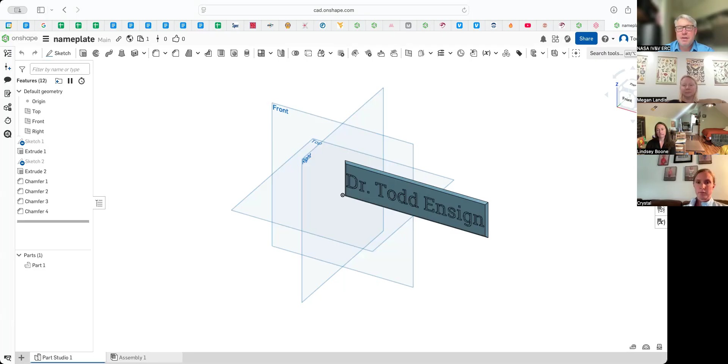So I said, well, I'll just make my own. As I advised before, you never begin a project without taking careful measurements or knowing what you're going to do. So I started on a piece of paper and sketched out the dimensions of the thing. Let me grab it.

I happen to have sitting in my office gray and black plastic. I didn't have beige and black, but here's what I'm going to do: I'm going to print some gray, then do a second layer in black, but use the extrude feature to remove material 1 millimeter deep. My theory was that the gray would show through.

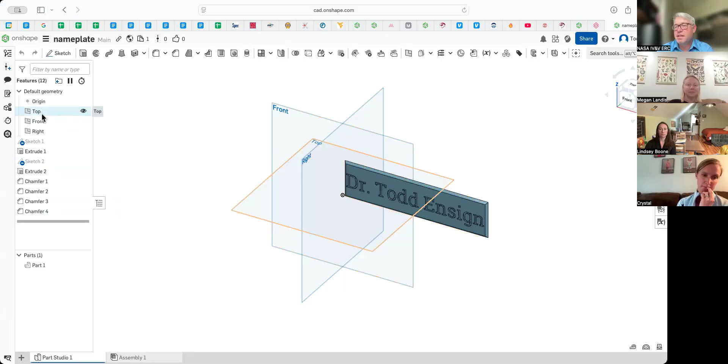So if you look over here at my model tree, you can see here's my work planes - top, front, right. And if I scroll down, there's sketch one. Let's open up sketch one, because if you're working with kids and they make something, they're like, Mom, it's broke, I don't know how to fix it.

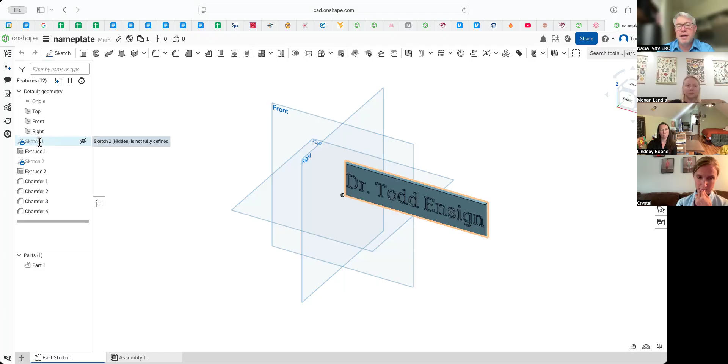What's going on? You have to dissect what they did and figure out how to fix it. So let's go into sketch one, which is the original outline. I'm going to square us up to the face, and here I can see I measured out the plate was 37 millimeters - we're going to stick with metric and millimeters for all these projects, okay?

I measured it at 152 across, and so here's the one I made compared to that one - they're really close. I'd say I might be a millimeter shy on one end over here, maybe it's 153, but otherwise it's really darn close.

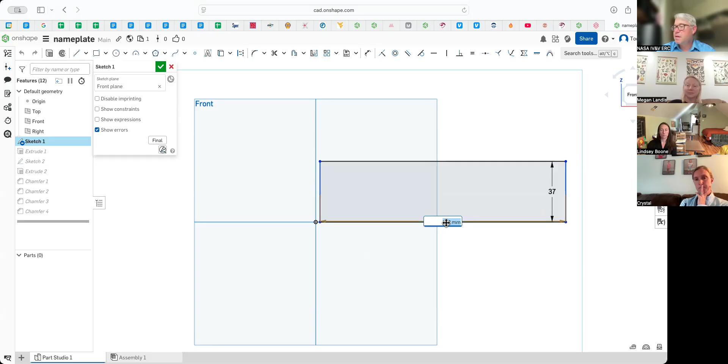What you could also do - I'm in the sketching tool - I can say it's 153 millimeters. Okay, I just messed something else up, but we'll see how that works. So I'm done with my sketcher, hit the checkbox, come back out.

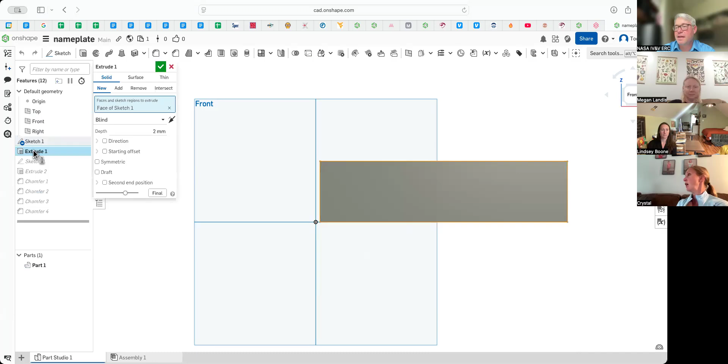Then what I did was a second sketch. So you can see, I extruded sketch one. Let's look at that. Okay, so if we want to see the thickness of it, if we look at it in isometric, you can see now that's no longer a dimensionless square. It's now essentially a cubic form - it has a third dimension, a z-axis now. I guess I made it 2 millimeters thick.

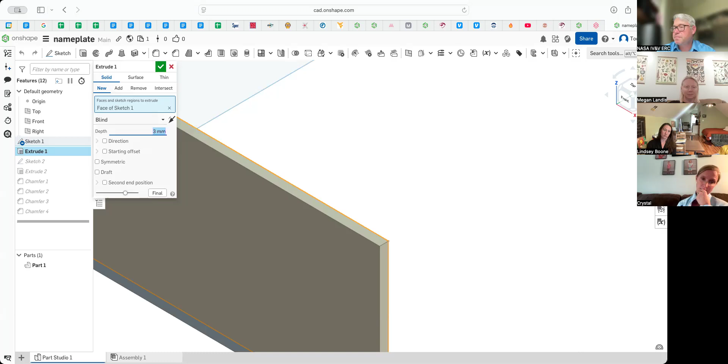Actually, it could be a little tighter - it does stay in there, but it could be a little tighter in the slot. So maybe I want to make it a little thicker, 3 millimeters.

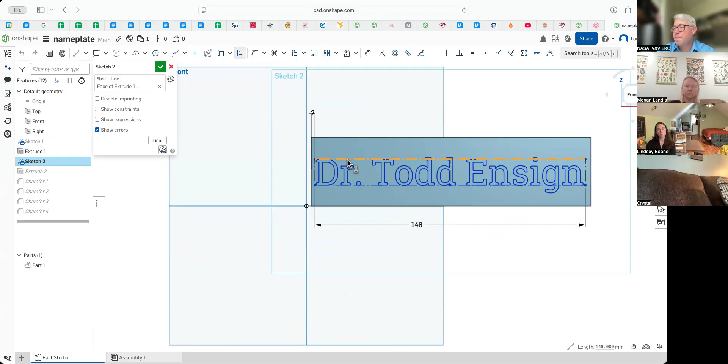Then I did a second sketch. Now this second sketch, what I did was I looked at my tools and there's a texting tool right here. So I went ahead and clicked that, added text, and if I click in here, we should be able to edit the text. So if I type something wrong, I can change that. There's also different fonts you can choose - maybe I want Roboto, not Roboto Slab.

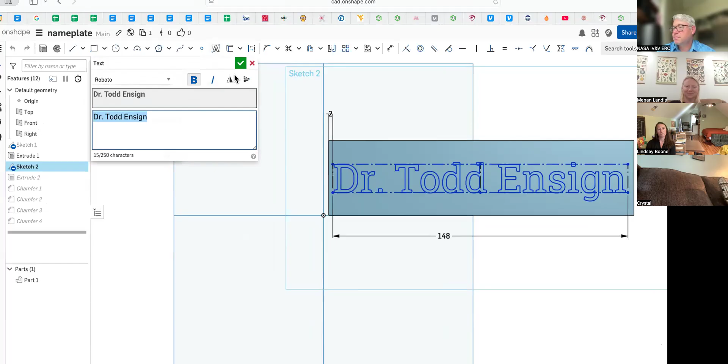Was it already bold? I can't tell. Nope, so it definitely looks different now. Okay, that's a different font.

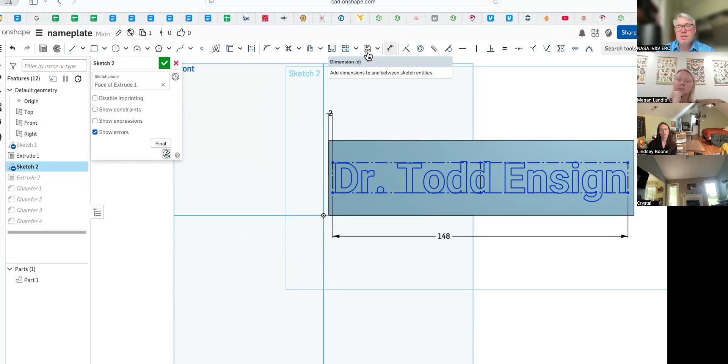I wanted to center it in here, and to do that I took the dimensioning tool, which we used before - that's the arrows pointing like this. This is a very important tool because if you want to put a hole in something, you need to know how far it is, and that's part of this pre-designed understanding of what I'm building and how it's going to get built. So this is where it gets to be math and engineering - this is where we're getting the STEM part in it.

So we just made this 148 millimeters, and I made it 2 millimeters apart from there. So I'm going to say it's 2.5, and that should center it now, I think. So it looks pretty good.

Okay, check. And now what I did to make those letters, which were just a dimensionless layer with no depth to them, is I extruded them. So I extruded them 1 millimeter into the material to create that engraved kind of aspect to it.

And I think that looks fine to me. That looks at least as deep - I think it's deeper than what they had in their original one.

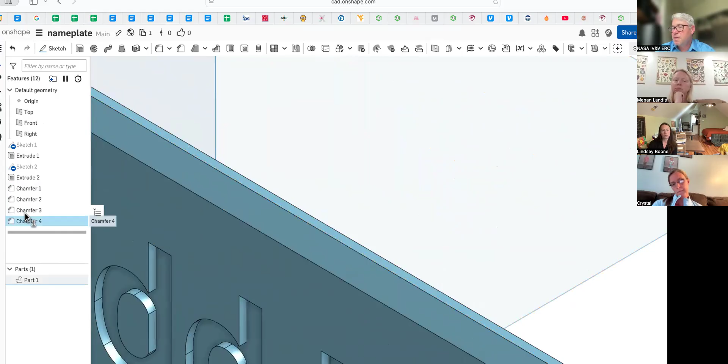Then I went through and I said, how is it going to slide in? The metal bracket has a little kind of edges on it. And so I went to the edge of the material and I chose essentially... let me delete that one. So if we look around here at this object...

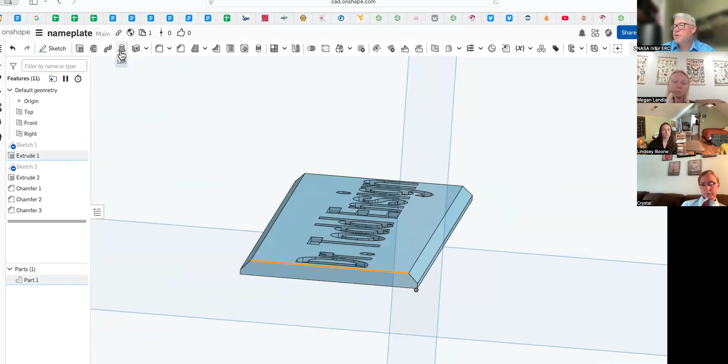Let's see, there it is. This edge is not chamfered. So I'm going to click on that edge right there. So I've only chosen the edge itself because that's what I want to do something to. Let me look through my features up here, and I can see - oh, chamfer.

And I'm going to make this - I think I just did 1 millimeter for all the rest. Nope, looks like they might have been 2 millimeters. Okay, can you see how the edge just got removed? Okay, checkbox, good. And that looks pretty sweet.

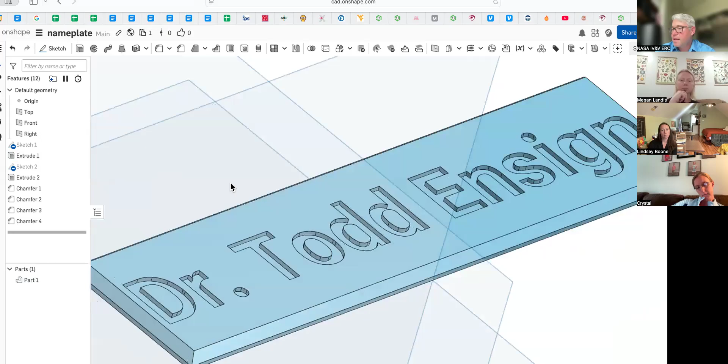So anyway, that's how I solved the problem I had. And that's what I'm trying to emphasize - once you get familiar with using CAD, these are things you can do yourself. So let's start a new project.

I'm going to hit Onshape, create document. You don't need to follow along step by step right now - I'm only going to show you one new feature. We've already done a cube, we've done a cylinder. Let's do a sphere. A sphere is going to get us into our revolve, and we're going to also learn about the cutting tool, which is also really important.

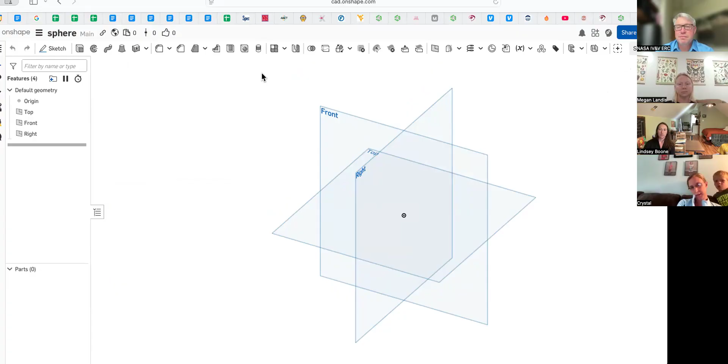So pick a work plane - anyone. Lindsey, which work plane should I work on? Top. Okay, I just read her mouth. So I click on the top, see how that works - now it's highlighted. So okay, I've selected one. I also could go over here to the model tree and click on the word top. I am going to spin it around so I'm looking straight down at my work surface.

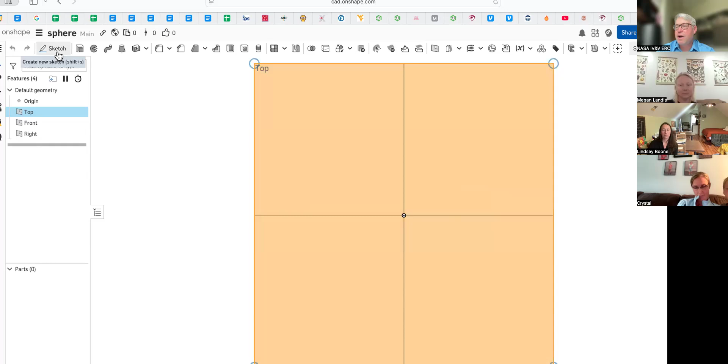I'm going to now go to the sketching tool. This sounding familiar? It was a week ago, but hopefully the pattern I'm doing - you're like, oh yeah, click this, click sketch. Okay, so now the tools have all changed. Now I have the sketching tools, and we're making a sphere.

Okay, so to make a sphere, what's the two-dimensional version of a sphere? Crystal, you got a helper there. What do you think? If we're looking at what's a sphere versus what's this two-dimensional shape?

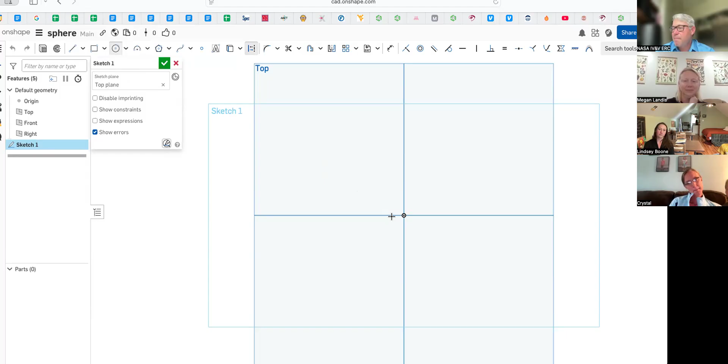Circle. Yeah. So what we're going to do - look, I have different circles in here, right? So here's my circle tool. There's a center point circle, a three-point circle, elliptical circle. Let's just choose a center point circle. I'm going to snap to the origin, see how I get close to that spot and it just highlights. So I click once and I drag my mouse away.

If you screw this up, you can always go back and edit the dimensions. But at this point, if I click one more time, it's asking me what dimension I'd like my sphere or my circle to be. And we've been making everything 1 inch just because 1 inch was kind of a convenient number.

And here's a pop quiz for you, because conversion of metric to imperial is important. So what would a 1 inch diameter circle be in millimeters? It was 22 point something. No.

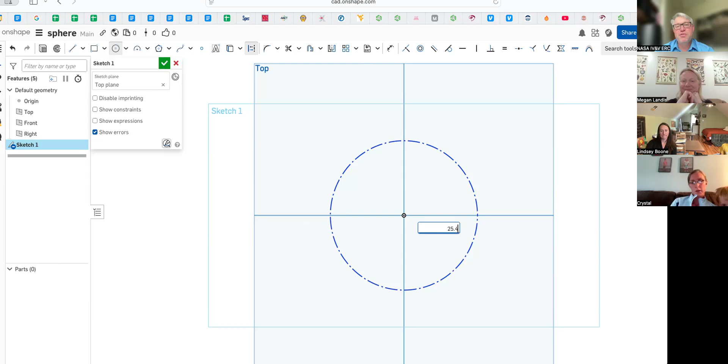Crystal with math: 25.4. So it turns out 2.54 centimeters is an inch, and because metric is a base-10 system, you just move the decimal. So 25.4 millimeters is 1 inch. Check, okay, so I did that.

Now, in order to do a sphere, I don't want an entire circle. What I want is half of a circle and an axis I can spin around. So how am I going to do that? Oh, I got the line tool.

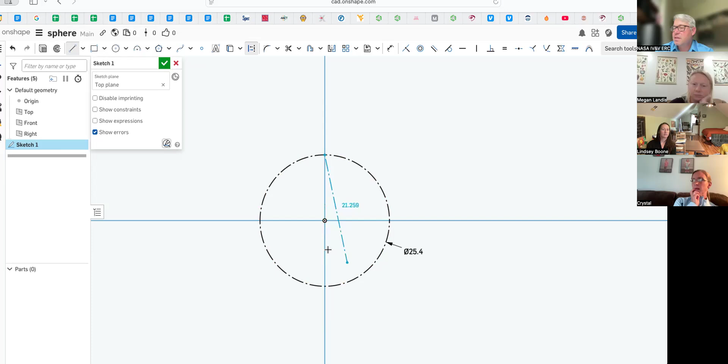Okay, line. If I bring my line tool over, it should snap. See how it's highlighting and snapping. I'm going to click right there and it's snapping to the main lines. I bring it down here and I can see the circle highlighting again, the outline of the circle. So I click again and now it wants to make more lines.

This is really annoying because you end up with like 18 lines all over the place, and you're like, stop making lines. So the escape button is your friend. I'm out now. I don't know if you can see it, but there's a line right there.

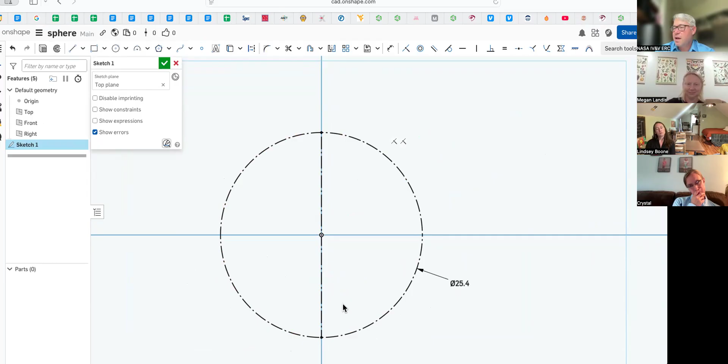Okay, so what we're going to do is look up here at our tools. We don't want a full circle and a line in the middle, you just want half a circle. So there's the trimming tool, and I'm going to trim that off. Okay, so now I have half a circle with a line through it right here.

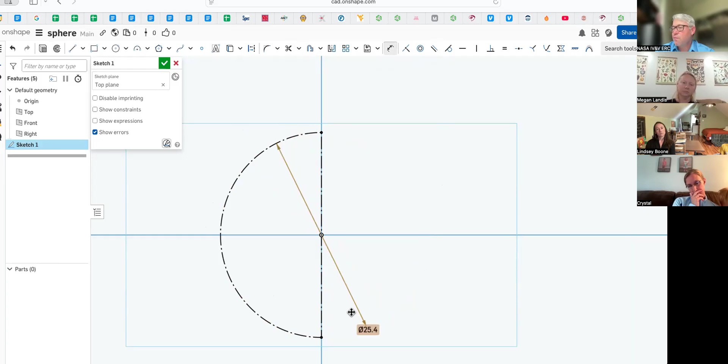And the dimension tool should still be referencing this diameter here. Okay, we're going to say check, we're done.

Now what we're going to do is highlight this shape. Actually, this is a great time to point out that I saw this mistake coming up and I was just going to see what happened. The lines are dotted, do you see they're not a solid line? That indicates it's called a construction line.

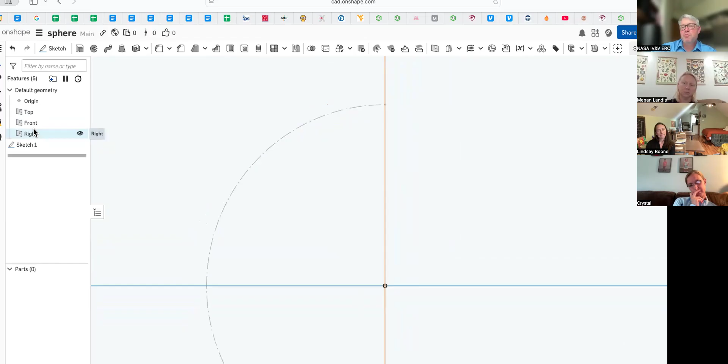Often I will make a construction line through something so I can find the midpoint or mark where I want to be able to snap to or make a measurement. I don't want to make that the object, I just want to have that as a tool for me to specify, well, here's the halfway mark or here's this. So I have to go back in the sketcher and click on that line.

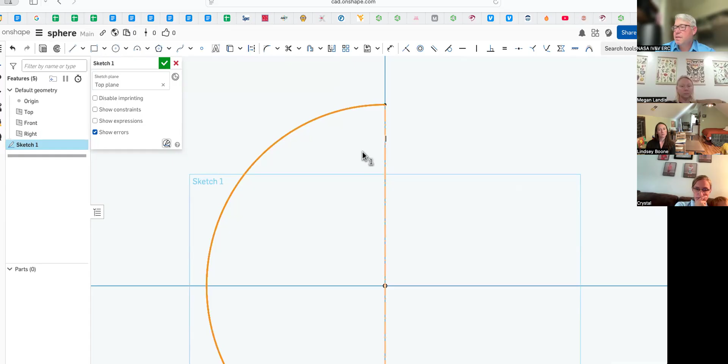And I didn't notice this when I was doing it, but the construction line is on, meaning that this is not a real line, it's an invisible line. I'm going to turn that off so that's a solid line. I'll click that line and turn that off. So now the shape is shaded in.

So I guess I should be embarrassed, this is not a smooth video where I show you perfectly how everything works. But I guess in a cool way, you get to see a mistake, right? The worst part is I knew it was going to happen, I saw the dotted lines. I'm like, why is that a construction tool? So apparently that button was either bumped by accident or it was selected.

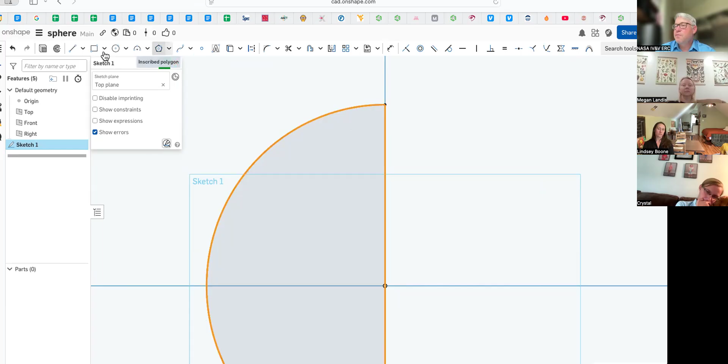So the shape is now shaded in and filled in. That tells you the shape is complete and closed. Why is that important? So for example, if I were using the line tool and I did a line, a line, a line, and got really, really close but didn't close that, you see how it's not shaded in? Okay, that's not a full shape.

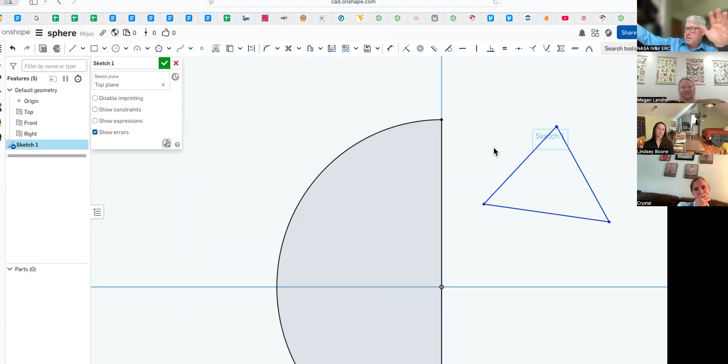So if I were to try to choose that, essentially the computer wouldn't know how to handle it. CAD software would be like, I don't know, it's going to spill out into everywhere. Even though zoomed out it looks like it's one line, it's not. So if I click on that and drag it up, I can connect it. Let's see, it's not connecting. That should be connected now.

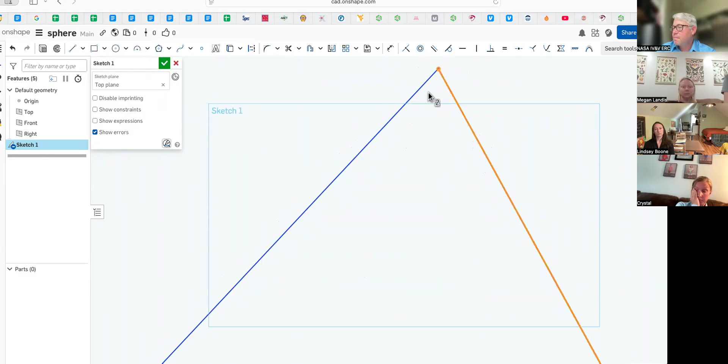Oh, that's not shading in. So if I were to take a square and do like this, see how it shades in? That means it's a closed object and all the edges are closed. Okay, so I'm going to just highlight these things and get rid of them. Okay, so we have a closed shape, it's shaded in, we can move on.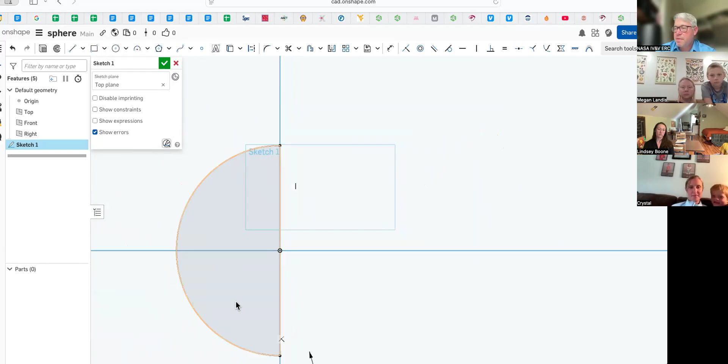So now we're going to try a new feature. Now that I'm out of Sketcher, we've already done extrude, we haven't done this other one here called revolve. So I click on revolve and it asks me for two critical things. One, it says right here in blue, faces and sketch regions to revolve. So the face is the shaded object. Click, it says okay great, got it. Then what's in red right down here, now it's asking me for, can you guys read that?

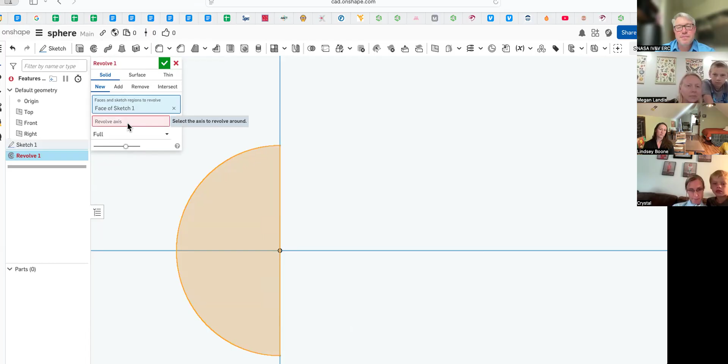The revolve axis - what axis am I revolving around? So I'm going to click on the red box and click on that line right there. What we're saying is we're going to take this two-dimensional half circle and spin it around that axis.

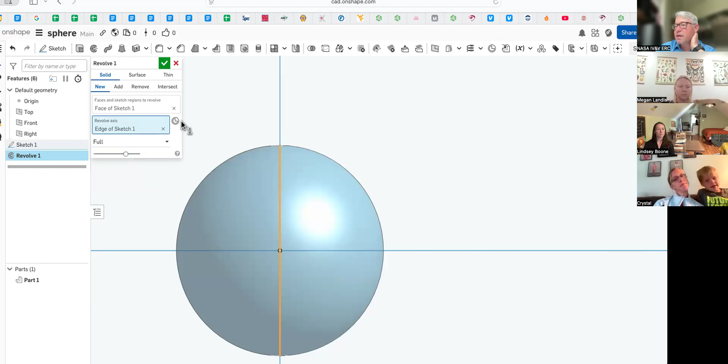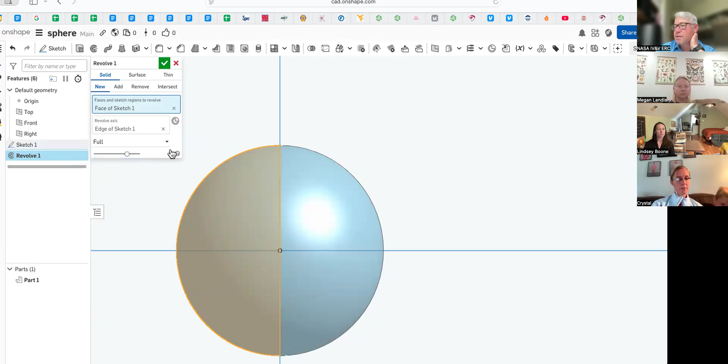I can show you that, because it says full right now. Let's see, I can usually preview - oh, that's just the shading. I was hoping I could show you how to do it not fully around. Oh, here we go, one direction. It says now I've done it 145 degrees. Can you guys see that it's now only a slice, like fancy cheese?

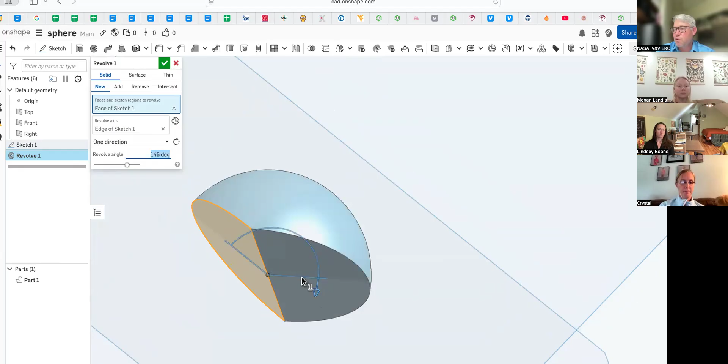Okay, and there's an arrow here. So this is what I wanted to show you - this is what's happening when I'm revolving around the axis. You can see the axis right here, which is the edge of that half circle, and it's adding material as we go. So if you only wanted to make a turtle shell - one of the cool stories I read recently was about people saving turtles who had their shell damaged by a propeller, by 3D printing a shell for them.

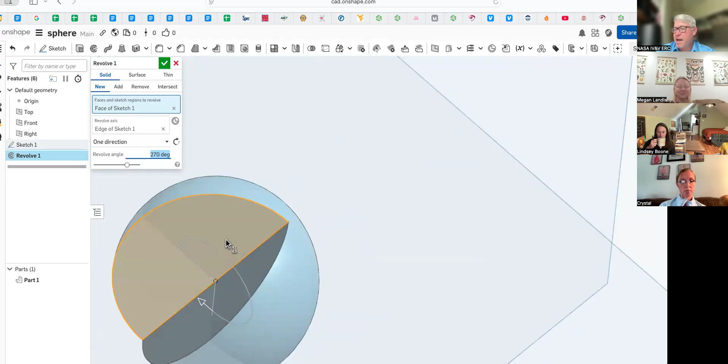So if I only needed a turtle, I'd go around only halfway. If for some reason I wanted to have Mrs. Pac-Man, I could do that. But usually, and it depends on what you're making, we're going to go all the way around. So there is the profile, there is the axis, and there's the shape.

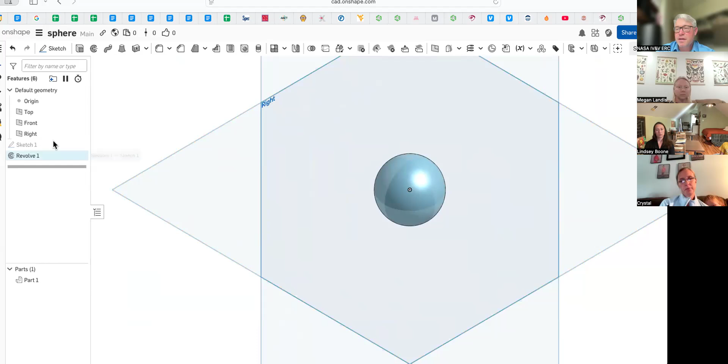So check, I made a sphere. I'm going to reiterate that next step, which is how do we make this ready for 3D printing? So I go down here to the word part. The whole object I made is highlighted. I right click and I choose export.

It says great, you probably want to export out in an STL format. I'm going to call it sphere, and it's in millimeters. We talked about resolution briefly before - if I'm doing a cube, I could choose coarse, it's just 90-degree angles, really easy, no need for any rounded objects. But if I drilled a hole through that, or had a round object, I really do have to choose the fine resolution. It's going to add more triangles, which is what STL files are.

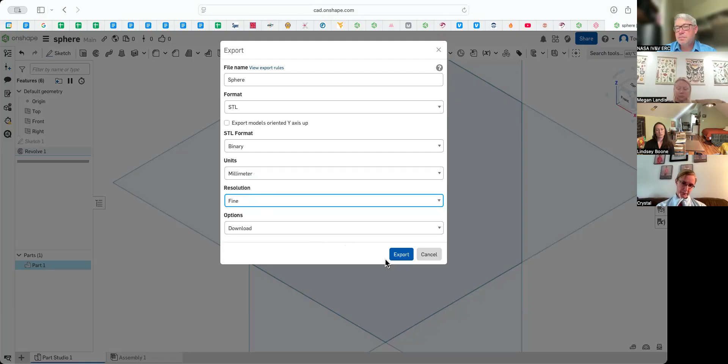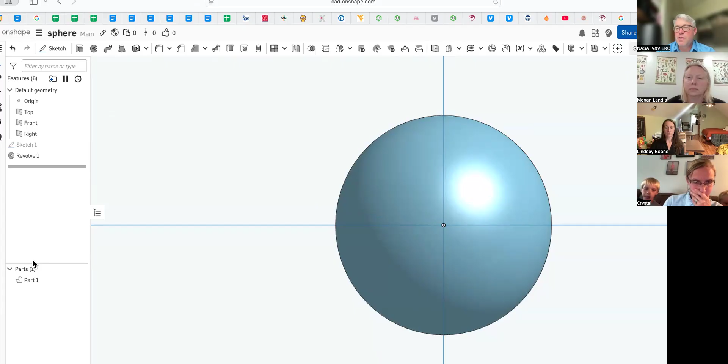It says download, I hit export. It says great, I'm going to go ahead and do that. It's saved right here. Okay, so what I'd like to do - we're going to pause and you're going to make a sphere. All right, so we made a sphere. I don't know if you had a chance to go ahead and click on the part and export it out as STL, but that was the last part.

Let's reinforce this concept of revolve - it is a really cool feature. I'll create a new document. Now, when I was in middle school, I made a lamp on a lathe. We took all this wood, glued it together, had this big giant chunk of wood, and then we put it on that lathe, and it spun around, and I chiseled away wood, right?

So if I want to make something like, I don't know, a lamp, what I'm going to do is create half a profile of what I want, and then I can revolve it.

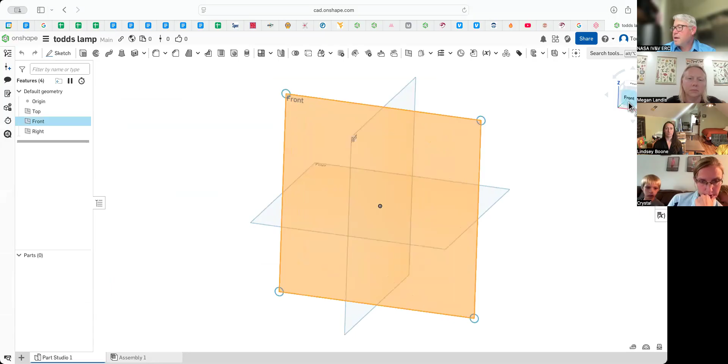So I'm going to click on the front work plane, and in this situation, I'm going to click my sketching tool - I'm just going to use my line tool. Now, in this case, I'm going to make a larger object. This is going to be a small desk lamp. But still, it's going to be, say, 5 inches across, so I need to be 2.5 inches in half of the profile.

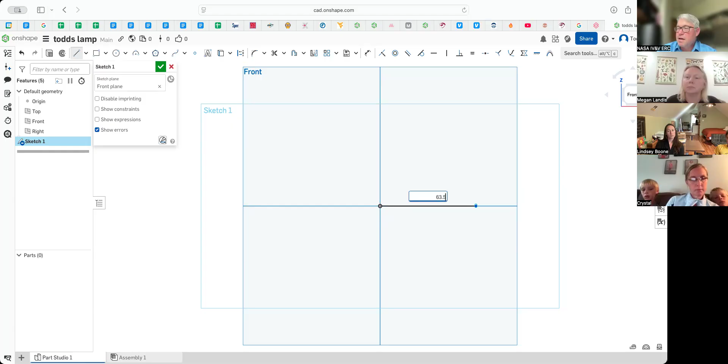So, 2.5 inches in metric is going to be - let's see, I'm in convert mode already - 25.4 times 2.5 inches equals 63 and a half. So I'm going to go ahead and make a line, and I draw it out and click, and I'm going to say 63.5. This is not really an important measurement, I made this up, but in trying to model, saying I know my exact dimension of what I want, because that's important to me, I click that.

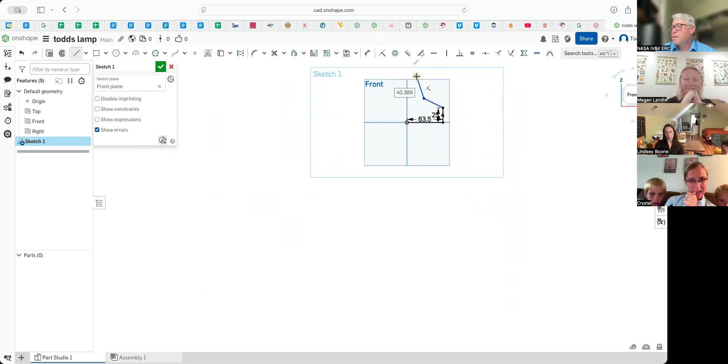Okay, and then it's going to go up - this is the base of my lamp. It's going to go up, say, 1 inch, so I click and say 25.4. And then it's going to come in to here. And now I'm just making a shape - let's see here, I'm all zoomed, we want to go ahead and zoom to fit here.

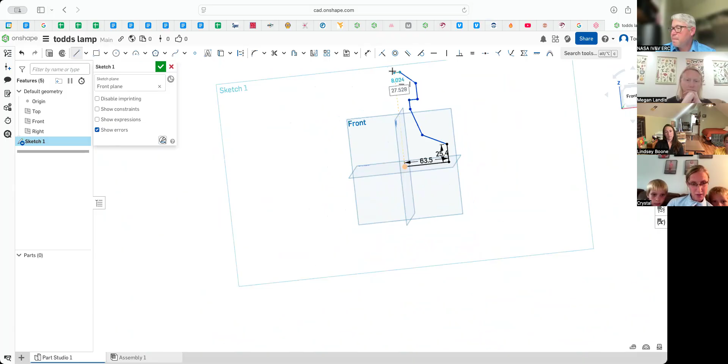And we can keep making more of these little lines, so it's just kind of whatever shape I want for my lamp. And let me square that back up.

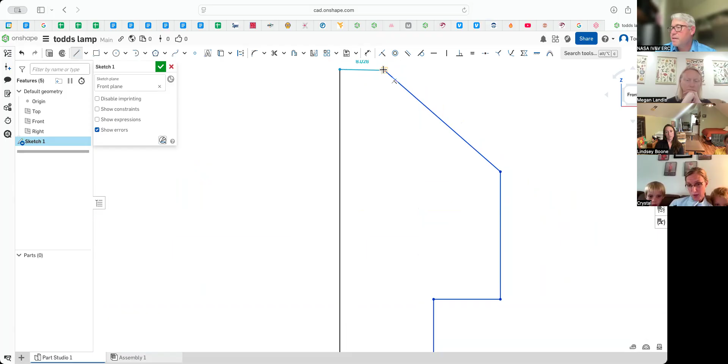I'm not going to ask you guys to all do this, I just want to illustrate how this works. This is important though, see how I am moving this line around and see how it's saying, oh, ooh, if I snap to that point, I now have a shape. You see how it all shaded in? That shaded in means it is now an actual closed shape.

If I'm not quite sure how tall this is right now, let's use a dimension tool. That's this tool right here. I'll click on that line, drag it out. It's 133 millimeters.

And maybe I need to make it, I'm not sure, let me do this one. So I made it 150. That's what I needed to do for my lamp. Okay, I'm gonna click check.

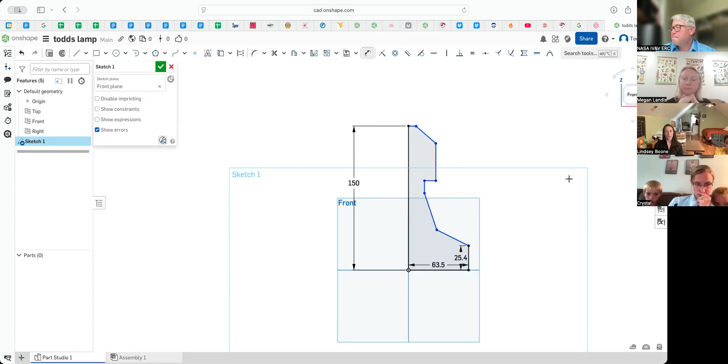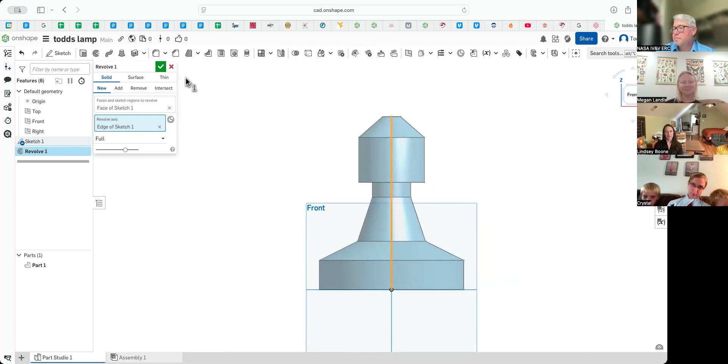And so then I go into our revolve. It says, give me the face that you want to revolve. I say that. And it says, give me the axis. So I click on the word revolve axis right there, and I say, this is the axis. And it says, there is your—actually, this looks more like a chess piece to me now. But the point is, okay, I say yes, that's great. Green checkbox. I made a pawn, apparently.

Okay, let me do this one more time again. Onshape, create, document. Okay, nose cone. So I've explained to you earlier that one of my favorite things to do is build rockets, and we just did a whole rocketry summer camp. One of the things that all the students did was they all made a nose cone.

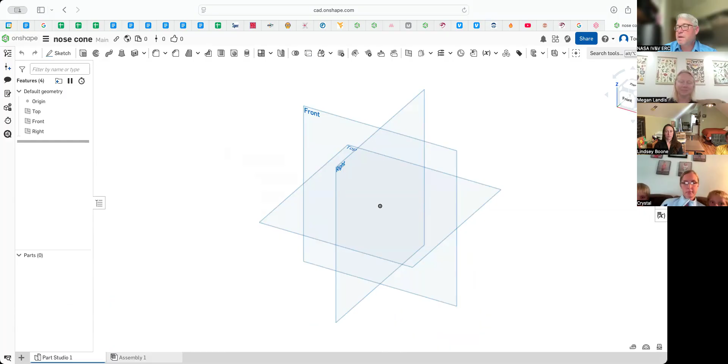So to make a nose cone for their rocket, they chose a work plane, then they knew certain dimensions of the rocket. For example, they knew that we have a 1 inch diameter body tube, and we want half of that. So half of a 1 inch tube is what in millimeters?

Would be 12.7. Correct. So I'm gonna choose my line tool, go here, just line tool, click. I'm snapping to that axis right there. I'm gonna say 12.7. Good. Now the shoulder is the part that sticks into the rocket, and I'm gonna make that a half an inch, which is gonna be another 12.7.

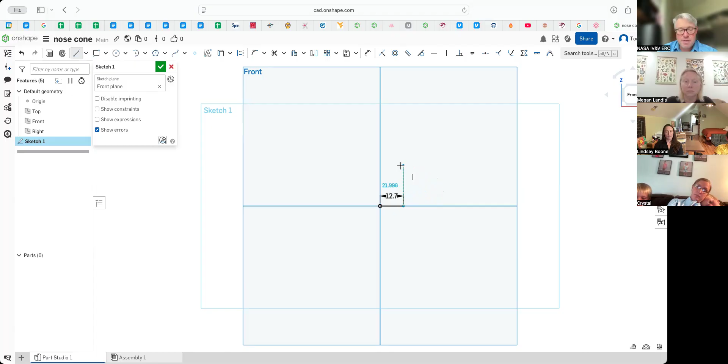Okay, now we're gonna stick out 1 millimeter here. It's a teeny bit. Okay, now I'm going to escape because at this point, what's important is that we want to be able to make the nose cone a certain height. So the height of this nose cone is going to be 75 millimeters. So I'll type 75.

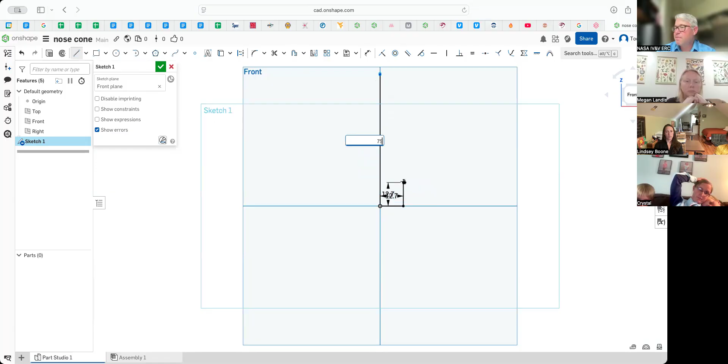And here's a fun thing. I'm gonna escape from this, and I'm gonna use a new drawing tool we haven't used before. This is called a tangent arc, and there's different flavors of it—conical, elliptical, center point. I like the 3 point. So I need to choose 2 points, which are the ends of my curve, and then I kind of define the radius of it.

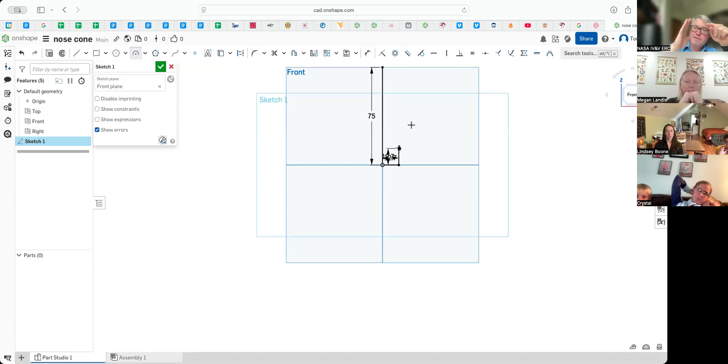To do that, I'm going to zoom in really tight and find the edge of that little 1 millimeter. So I got that. Then I'm going to click on the top of my line here, and now I can define my third one. And so this gives me a really neat shape for a nose cone.

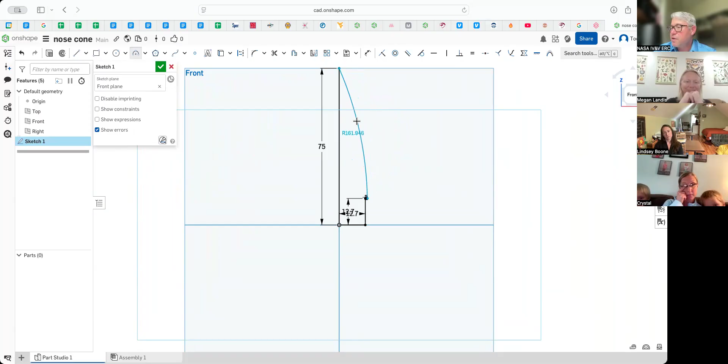So this could be a very strange nose cone, okay, it would get kind of larger as it went out, which would be kind of fun, but I'm gonna choose—this looks like a pretty standard nose cone to me. And you see how it's shaded in? So that means that this is a fully enclosed object. So I hit check, and again, we're just reinforcing the revolve feature.

Like Todd, how would I use revolve and why? Well, apparently for making a pawn for your chess piece that was missing, you can 3D print and solve a problem you have. Or in this case, a nose cone for a rocket. So I'm going to go ahead now, hit revolve.

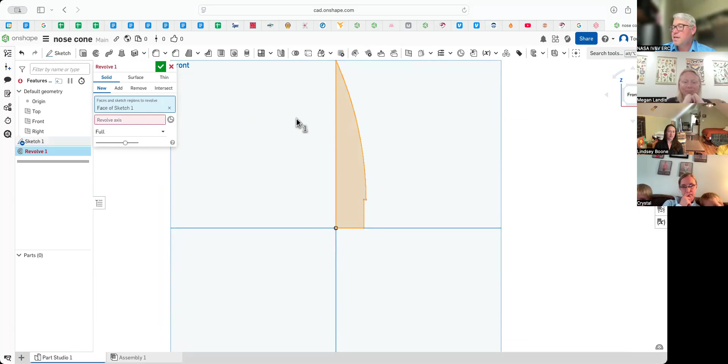I choose, it says face of sketch, okay, that's the face. It says, and I click on the word revolve axis. What's axis? This is the axis I want. Boom. Okay, that's what I was thinking.

That's what I was imagining, a nose cone for my rocket. So I click check. Now the problem is this one's solid, the whole thing's full. That would make a very heavy nose cone, which might be okay for me, but I also don't really want a fully filled in nose cone.

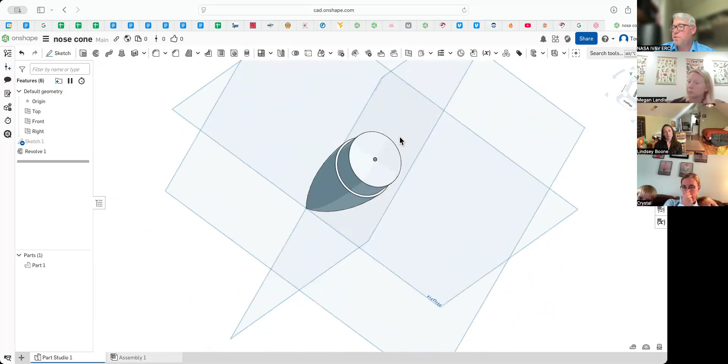But I'm going to click on this bottom circle right here, and here's a new feature. We have all these different features up here — these create three-dimensional objects, and these let you tweak your three-dimensional object. One of them says shell solid. Click on that, and it says I think I want to do a 2.5 millimeter thick wall.

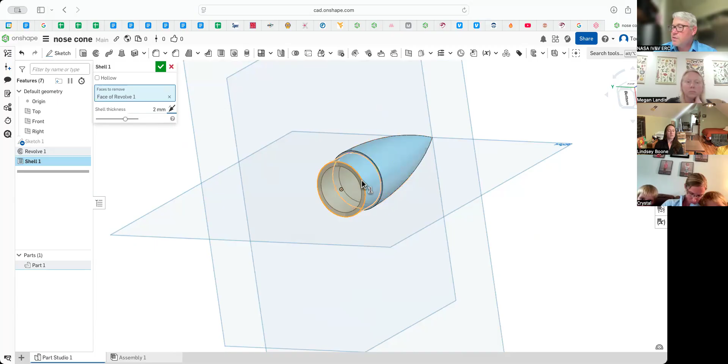I'm going to say, nah, I think 2 is enough. So it's going to hollow out the entire object 2 millimeters. Check. And now I have a hollow nose cone for my rocket.

So again, this is how I use Revolve on a routine basis. Pretty cool, huh? All right.

I think we have 7 minutes left. Are we cutting this off at 1 o'clock? How are we doing? 1 o'clock would be good for me.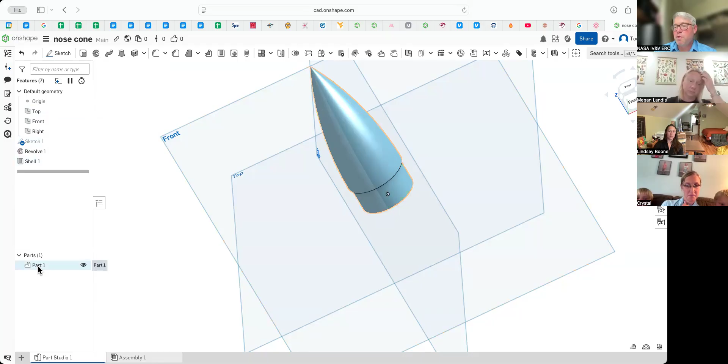So what I'd like you to do is go ahead and practice exporting your feature, your shape, your whole part out as STL. So we click on it here. All right, it says part.

We right click, choose export. It says, okay, what do you want to call it? Part Studio One, Part One. Now I'm going to call it 1 inch nose cone. STL format, millimeters, resolution fine, export.

Okay, so that's something I'm going to have you guys do. And just to reiterate, how do we get this into the software wherein we print it and do that slicing and stuff? We talked about this last class. Just to re-emphasize how this works, we're going to use a slicing software. I have the Makerbot print software, which I sent you in an email so you can download.

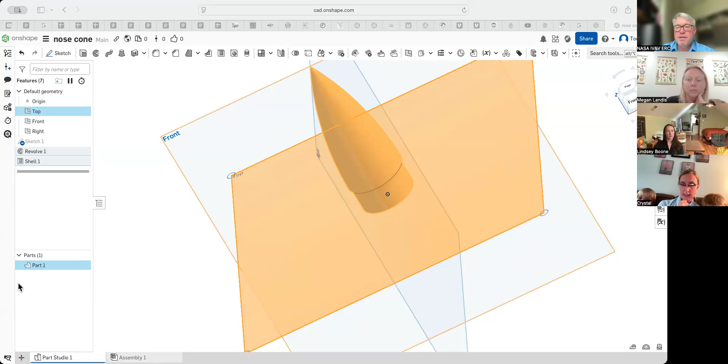And in Makerbot print, I'm going to have to change my share. Okay, so hopefully you're seeing Makerbot print now. Yes, no, maybe not. Okay, let me try again. It showed up for a second. How about now? Yes, can you hear me now?

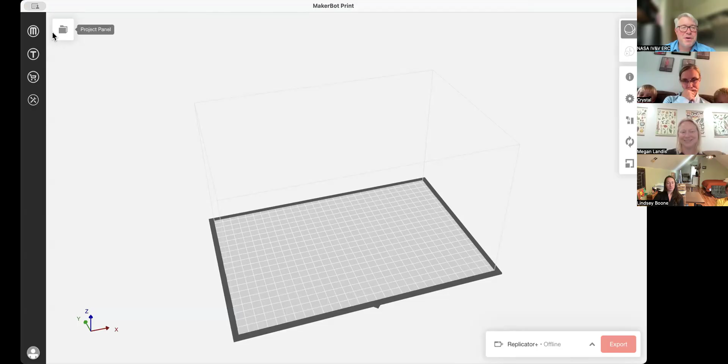Okay, great. So over here in the project panel, I'll click that. I'll click Add New Model, and here's 1 inch nose cone. And I'll hit Open. And it says, great, I think I should print it in this orientation.

We talked briefly last class about this — this matters. If I were to print this on its side or upside down, it's going to have to print all kinds of support plastic because it can't. Imagine that you're building something with your cake decorating tool, squirting frosting out, kind of like thick caulk or your hot glue gun, and I want you to print out in the middle of midair. You can't do that — you'd have to have something to print onto.

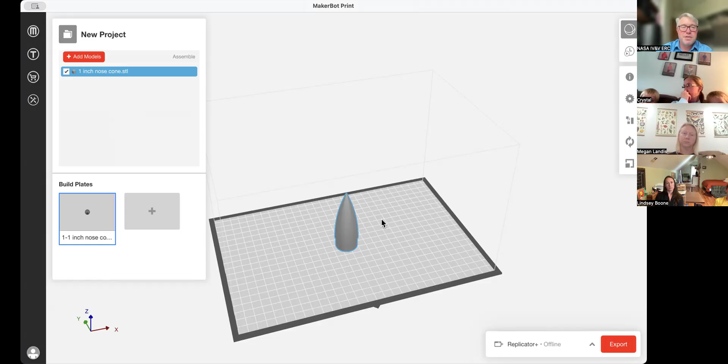Now, if I was printing a nose cone on its side, it'd be hard to get that curved shape without building a support system underneath of it. And so if I print it in this orientation, it's going to be able to just print circles and build up and get smaller and smaller as it goes. And so that is the correct orientation for me.

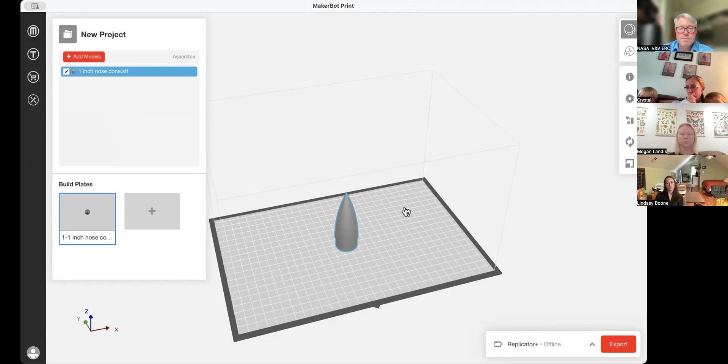And from this part, what we would do is we would export out our nose cone, and it's going to create that G code. And as I mentioned last class, Makerbot is the printer that we loan out from the ERC. It works very similar to other 3D printers. I do like here it tells you PLA material, how long it's going to take.

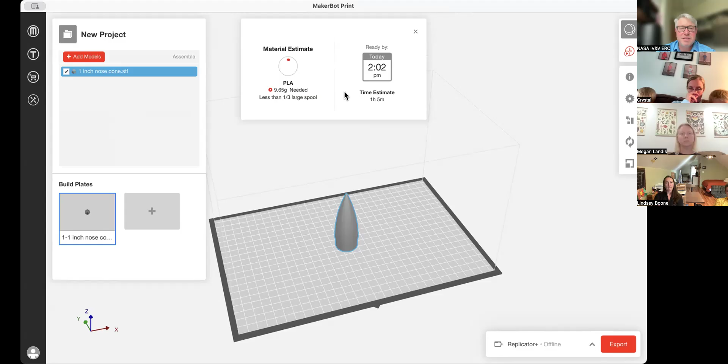It's going to take this long, but it doesn't give me as much cool data as I can get. Here's a print preview — actually it's showing you printing it. So that's model material, prints a little support ring around there, and prints it out.

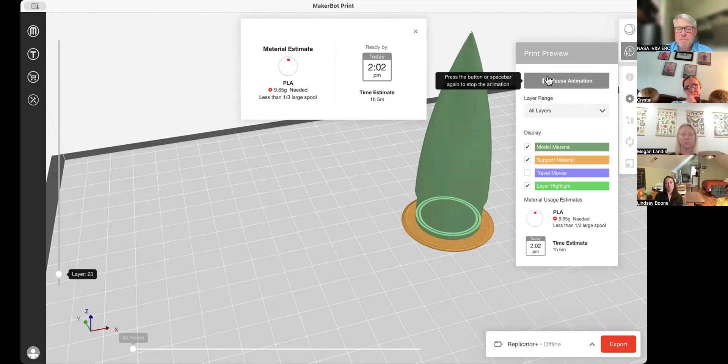So that's kind of showing you the orientation of how it's going to print, and that's the path that the 3D printer nozzle will make as it moves around. Kind of cool, huh? So that's how the Makerbot print software works.

On our third class, we'll be getting together in person. We will go ahead and actually open the Makerbot printer, turn it on, level the bed, and print a test file. Then we'll import files that you made, your STL files, using the G code.

So you don't just take an STL file — there's that one more step, right? We have to tell the printer where to position itself, how much plastic to squirt, and then what path it's going to take. And that's the language that this little robot uses to know how to build your part.

So I definitely had a misconception when I first started that I could just stick an STL file into the printer and it would print it. But I was neglecting to understand that there's a whole processing of the image itself, of the file, to create the step-by-step code that's used in the G code.

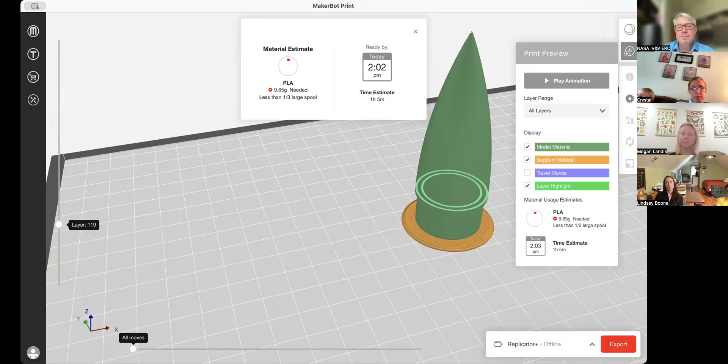So we learned a new feature today called Revolve. We've hopefully reinforced exporting out as STL, and we've glimpsed again that next step where we import it into a slicing software, in this case, Makerbot.

I have one question. I think it's pretty simple, but whenever I go to make that circle, if I don't get the type right on the first try, I can't figure out how to bring up a box for me to type in again. Does that make sense?

It totally does, and I'll go ahead and leave this on the recording. I'll show you how to solve that problem, because it is my expectation that you're going to run into these issues. That's kind of the reason we're doing the training - if you just want to watch me do it once perfectly, that's great, but it doesn't help you solve real life issues.

So we were talking about the sphere, correct? Okay, so we're in the sphere, and here's sketch one. I'm going to open that. I'm not seeing your screen right now. Oh, that's right, sorry. No worries, I was looking at MakerBot. There you go, okay, so here we are, we're back where you were.

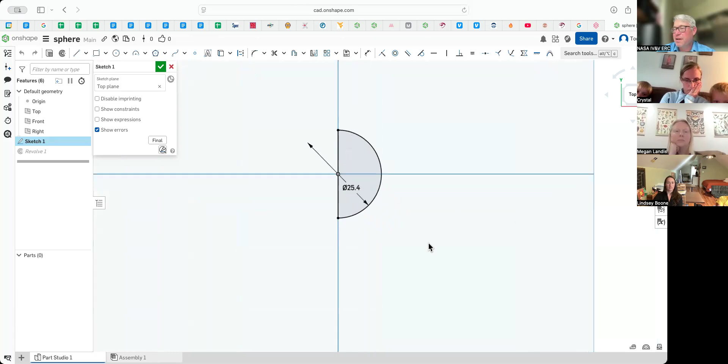Now you said I didn't have a dimension. Oops, I have no dimension, I deleted it. Okay, so how do I define the diameter of the circle?

So what I'm going to do is I'm going to click the dimensioning tool, click on that line, and that's how I can define it. Now this is kind of a weird way to define - I defined the length of that line.

What I can do also, let's delete that again - dimension tool, click on the circle, and this is going to give me the radius, right? Because it's not a full circle, it's showing me the radii. But we knew the radius, half of 25.4 is 12.7. So that's how I can define it.

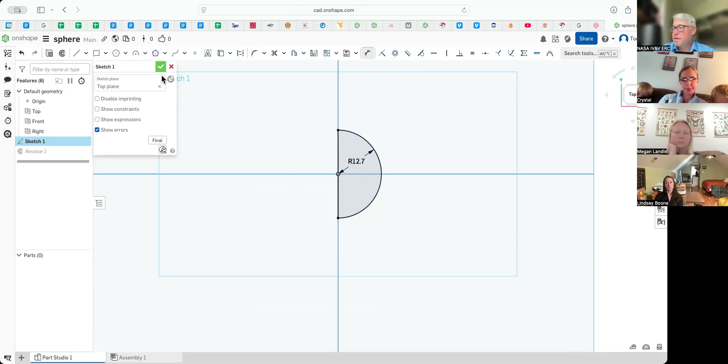Thank you, that's helpful. Even if I were to go ahead and get out of the dimensioning tool, delete everything, and I were to start over with the circle and click on it, it has a dimension. So let's see, and now you can't see it, but there is a dimension there. It does have a size.

So here's a circle with no obvious indication of the dimension, even though there is a dimension to it. Click on my dimensioning tool, click on the circle, and it should be giving me the full diameter now. Okay, so that dimensioning tool is your friend. So now I can do 25.4, and now I've made my circle, I've defined it. That's great.

And when you got that warning about your sketch not being fully constrained or defined, part of that is that some measurements are defined, some aren't, and very likely you have two measurements that are in conflict. You may even get a warning 'over constrained,' meaning you've added so many measurements - like you said it was this radius and you said it was this diameter, but those aren't the same. So I'm confused.

So you can always just click on a dimension and delete it, or you can add a dimension here - that's giving me the radius right there. I can always then change it. Now it's a 2-inch diameter circle.

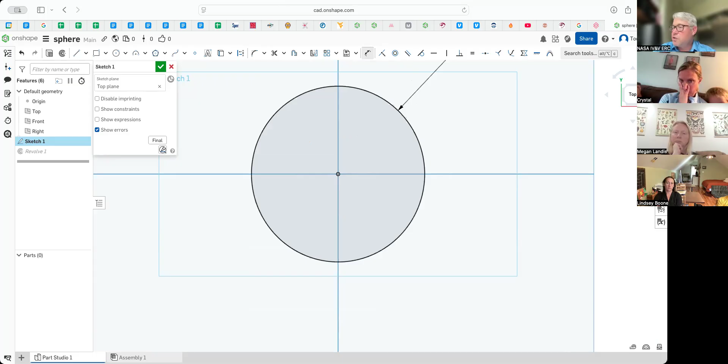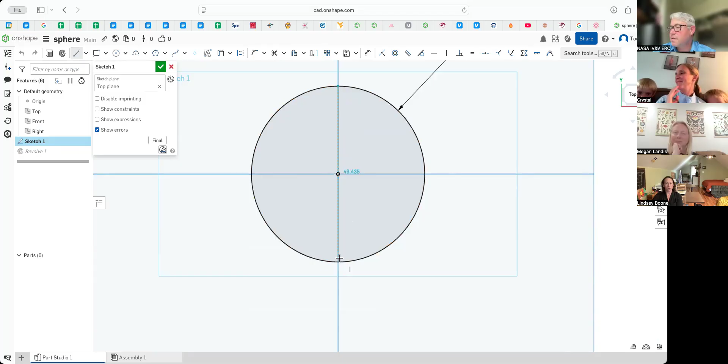My revolve's angry at me because it doesn't know what it was looking for. So I'll just do those. Oh, I don't have half a circle here, so I can't do a revolve without half a circle. I forgot the bisecting line - click, click, and we will delete half of that.

I put a hat on. Yeah, your hat looked very cool.